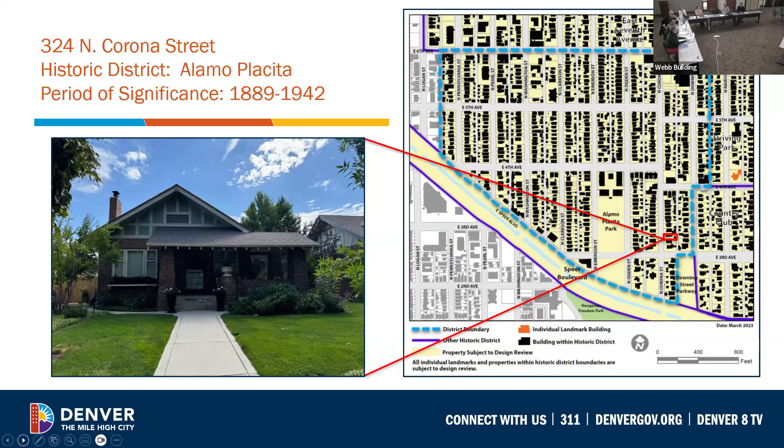The addition roof will be clad in EPDM, and the fascia and soffits will be wood. The addition walls will be clad in HardiePlank, Artisan V-Groove siding, as well as brick veneer. The plank siding will have a reveal that has changed from the previous design, which was 4 to 8 inches alternating, to 3 to 5 inches alternating. The applicant added a 3-foot water course with a soldier course cap that aligns with the foundation banding detail on the primary structure. This was something presented or recommended by the commission at the February 18th meeting. The proposed brick veneer will be a salvage brick material to match the historic foundation of the house.

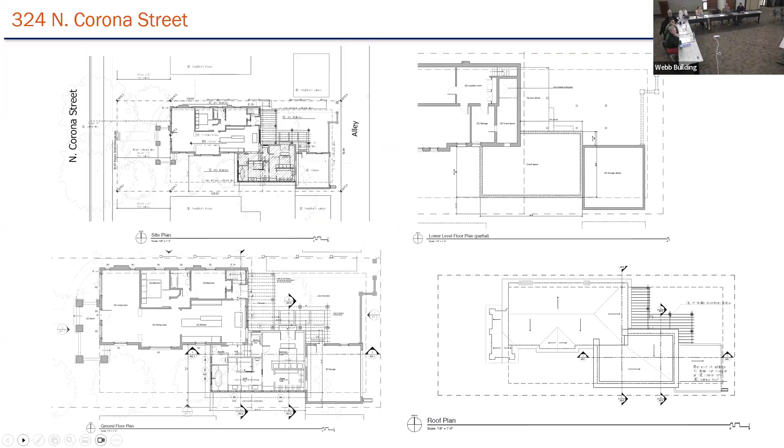Nope, actually can you move forward? Forward again. Forward again.

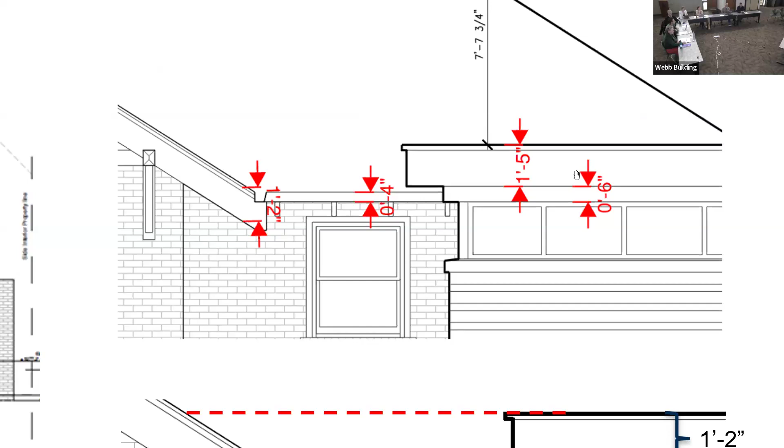Here. So you can see in the upper right-hand image, the 1 foot 2 inches is the distance, basically that fascia board that runs at the gable ends of the primary structure. The 4 inches references the horizontal detail on the hipped roof portion of the structure. So those were the reference points that we were pulling from. These may not be exact. I pulled these dimensions from Bluebeam, so those would need to be detailed out by physical site measurements, just to make sure there's better alignment. Thank you.

Any other questions? Right, I think we're ready to hear from the applicants.

If you would begin with your name and... Anne Cuthbertson, the architect for the project. The owner, Nancy Van Cleve, is also here present. And you have up to 10 minutes. Perfect.

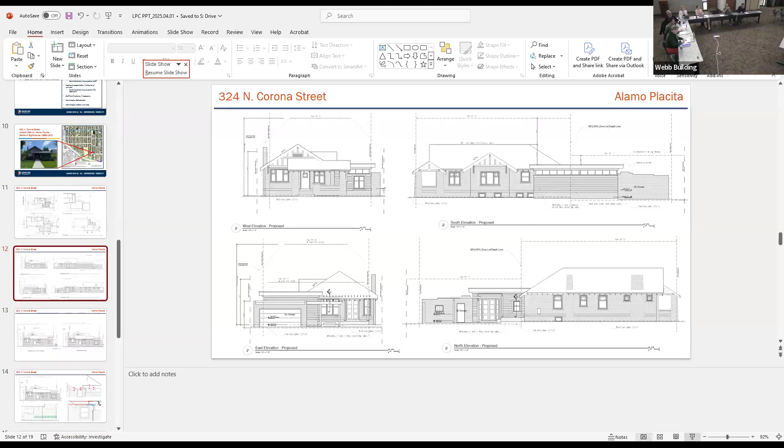I just wanted to summarize the changes that we did make. I hope and think that we addressed all of the comments from the commission's last meeting. And Jesse reviewed them, but there were a couple of comments that were very specific that we think we've also addressed, and I just want to highlight those. We don't have to go back through the drawings for right now.

One comment had been that someone was uncomfortable with how the siding just seemed to die off at the bottom, and so we're hopeful that the brick course will give the siding a more pronounced place to land at the bottom. The other thing that was in the submittal package, but I don't know that it was highlighted in the slides, is we did include some images. Someone had commented that they were having trouble visualizing what we meant by alternating the siding heights, and so we had pulled an image of another project that showed that.

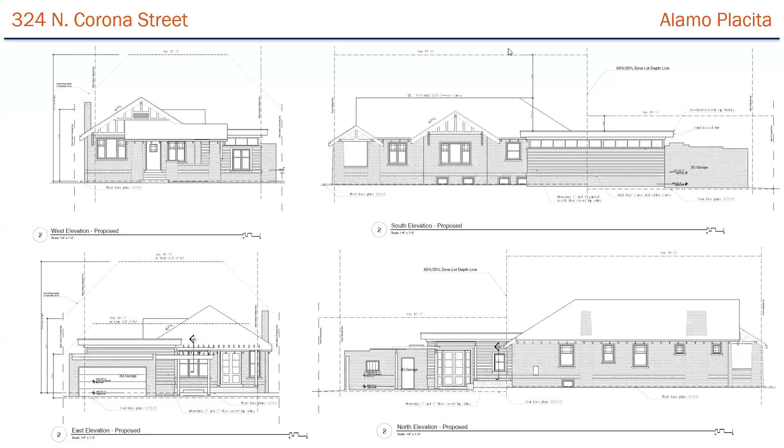Brittany, is that something that you could bring up? It would have been part of the photographs. I unfortunately don't have that, but the commission would have it in their packet, Anne. Okay, so it's probably the second to last image of the photographic part and the product information in your packages. I don't know if you guys can find that now.

That was just in reference to someone saying they had trouble visualizing what we were talking about with the alternating. I, in general, like to alternate the siding so it takes it away from being so overused, particularly in suburban parts of town. I find it gives a little bit more detail to an otherwise fairly commonly used material. But I want to make sure that you understand the image that I included was the larger widths or heights.

And we are talking about something more compressed than that. So we're talking about alternating 3-inch and 5-inch, which still courses out with the brick module that we were trying to work with before, but it just meets the guidelines more specifically in terms of that maximum height. So hopefully that image was helpful for people that were having trouble picturing that. I think more than one commission member wanted just to understand what we meant by that alternating height.

There was a difference of opinion, I'd say, last time in the comments I heard about the windows stepping down compared to the existing house. So one of the things I want to say about the west elevation is, as you practicing architects know, these orthographic projections are such an abstraction. That's never how you'll see a 3-dimensional object in space.

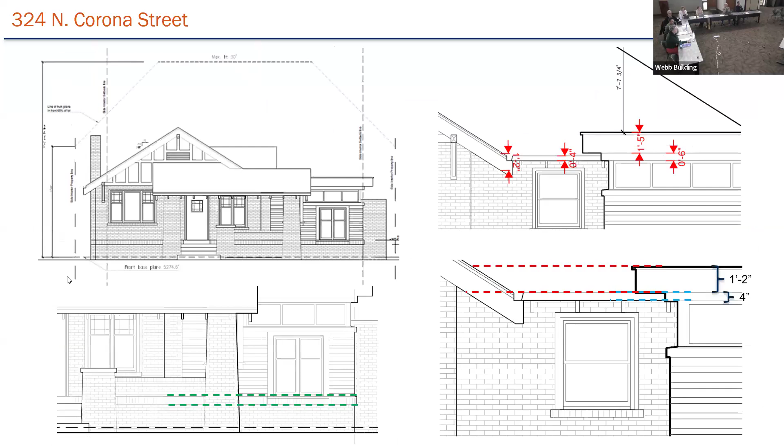So if we could go, Brittany, to the image with the section that showed the entire west elevation... maybe one more? I only have what Jesse put in the presentation. She showed it in the drawing I'm talking about, a section through the main house that shows the entire west elevation of the addition. There it is. Yes, thank you. Okay, continuing your time.

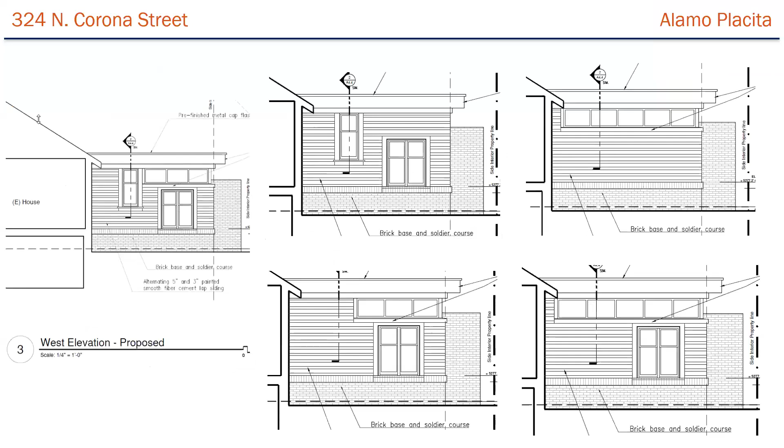So you can see the floor level of the main house in this section, and the sill of the powder room window, the furthest one on the left. That sill matches up with the kitchen window right around the corner on the main house. I think that relationship would read very strongly when seeing the addition in conjunction with the main house, as well as the brick soldier course carrying directly around the corner, 2 feet away from the existing window on the main house.

In my view, the proportions of that powder room window, and the proportion of the double cottage hung windows at the main bathroom, are exactly the size of the dining room windows and elsewhere on the house where there are typically paired cottage hung windows. They're exactly the same width, height, and proportion.

So I think, as you're seeing the south elevation of the main house in conjunction with this west elevation, those relationships will be very clear and easy to grasp, even for someone not in the industry. In my view, the height of the clerestory windows picks up exactly with the height of the top sash of all the cottage hung windows on the main house.

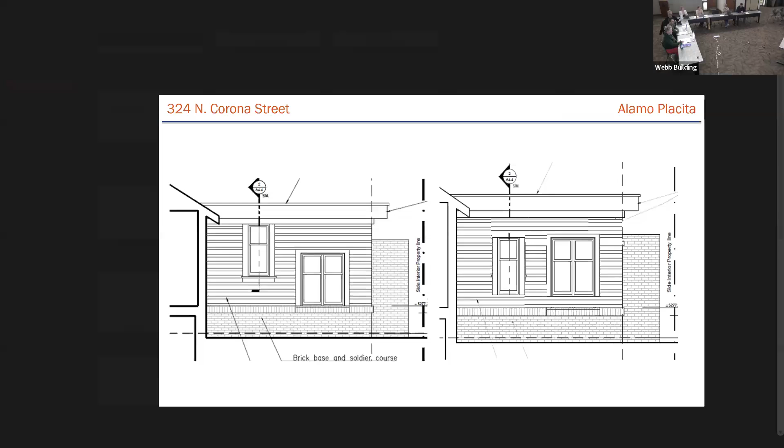I think we tried our best to respond to all the comments from the commission last time. We are certainly very comfortable — it seems like an oddly specific recommendation from staff to change the heights of the header and fascia, but we'd be fine with that if it's a condition of approval. We would like to stay with the west elevation as we're proposing, since it ties the proportions and heights of the main house as it wraps around the corner onto the west elevation, then resolves as it wraps around onto the south elevation of the addition. So that is what we hope is approved: the west elevation as drawn.

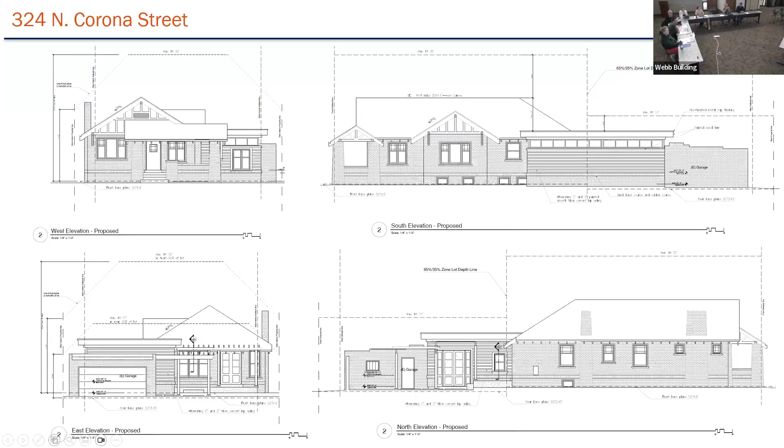Larry: If we didn't approve the west elevation as drawn, would you prefer that be the denial so you have more creative latitude to respond, or would you prefer conditions listed knowing you'd be constrained to keep this? I think my client would really like to move forward with this project, so our goal would be to have approval with conditions. A fifth option that could be considered is the elevation on the west side, but having the powder room window head align with the windows of the bathroom, and by geometry it would have to be a smaller window. But I think that would also be acceptable to Nancy, to have some type of window.

In other words, can I go up? That this window could drop down to be aligned with the head of this window, and then maybe it's just the top sash is the entire window. That would be acceptable, or even a smaller window, something operable into the powder room, right?

Somebody's phone. Jesse, is this yours? Yes.

On your proposed west elevation, would you consider eliminating the northernmost clerestory pane and then moving the windows below so that they align with the clerestory mullions? Yes and no. The interior of those windows is right centered on a bathtub, which is centered on the whole rest of the bathroom, so it would be an odd loss on the interior to move the double windows.

Yes, Nick. Refresh my memory, the last time you presented, were there more 3D renderings? The only one I see in the resubmittal is within the materials board, and I think it's the dated rendering. I did try to update the 3D model and I just ran out of time, so it's true that we don't have the updated 3D model.

Yes, so Brittany, if we could go to that detail west elevation. Absolutely, staff, as we said during our presentation, we do understand there are issues with the floor to ceiling heights there and that there's a step down from the powder room into that main bathroom area, and that moving it in this way may not be ideal.

We had mentioned in an email to the applicant that another option would be to keep the sill and header height of the paired cottage windows in the same location, but reduce the sash size for the powder room window, and align the header so that we're accomplishing the balance on that west elevation, pulling from proportions on the existing house.

We didn't have enough time to go through all the potential options, and wanted to leave that up to commission deliberation. But that, as the applicant presented as a fifth option, would potentially be one we would be supportive of as well. I understand the perception at an angle may be slightly different, but we don't feel like it will be so significantly different viewing it from the street.

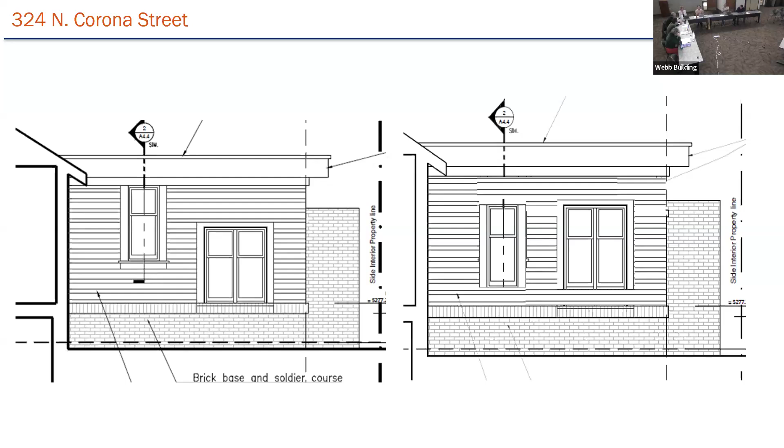Yeah, okay, we can talk about it in deliberation. The compound miter, that's a hard thing to do. It happens all the time. Okay, I think it sounds like, thank you, Jesse. I think we're ready to move into deliberation, talking comments, so let's keep going.

What do you all think as far as? We have at least two broad categories of recommendation from staff, either denial or approval with conditions, but with the knowledge that the conditions should be specific and actionable. So are there any general thoughts on that? I thought maybe we'd start there. I guess what I would start with is...

I'm a little bit struggling with the conditional approval because of the windows, and it feels like the applicant would like to study more options than what are really on the table with this conditional approval. I would say that in terms of the windows, I do agree with staff that the composition of that elevation will be seen largely as an elevational composition from the street, and it does feel kind of jumbled, with a lot happening there, jumping around different levels.

That does feel not subordinate to the main structure. So yeah, that's my feeling. I think the roof one is more straightforward. The windows are hard—that's better said than my earlier comment. That's exactly the point I was trying to get to, is that there's a lot happening there. It's busy and it does distract, I think, from the main structure.

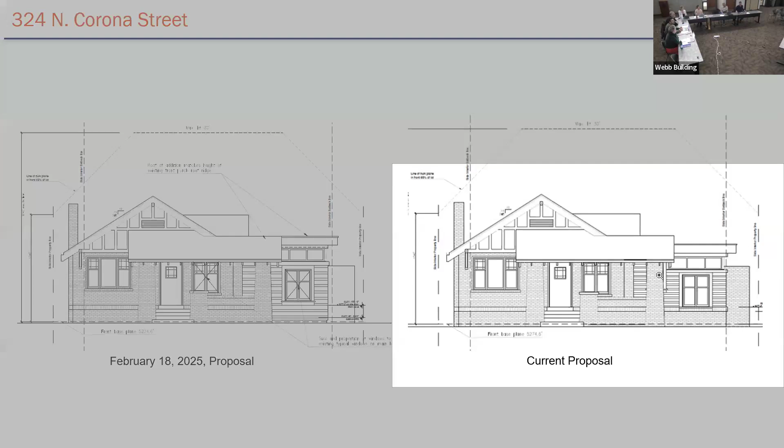That's the only... but that section doesn't really do it justice either, does it? Because that's not what you're really going to see from the street view. Right, this would be more realistic. But you also wouldn't - that powder room window is completely hidden from this view, whereas you would see it just by walking a foot or two to the right.

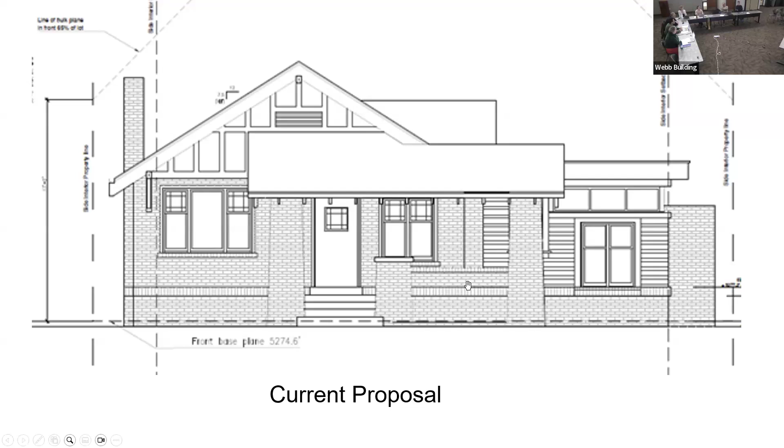Right. So again, the limitations of this orthogonal depiction. Would an option be for us to approve with the elimination of the half bath powder room window, with an understanding that they might come back to us on that element alone?

Jesse, do you have any thoughts on that? I stand by clear conditions. If you're making a condition, knowing that it will likely have to come back to you, it may be cleaner to do denial. But if you can come up with clear conditions that are easily implementable, we can accept that. If it's cleaner for you all to recommend denial, we can accept that. If you feel this is fine as is and you want to approve it, we'll accept that as well.

You can always approve it with the elimination of that bathroom window. I know that's not a condition recommended by staff, but if that is what the commission feels would be the best solution for this project, you can make that a condition of approval. That doesn't prevent the applicant from redesigning it later and adding it back in some other configuration, which may come back to the commission again. But you can always approve it with that condition if that's what the commission feels is best.

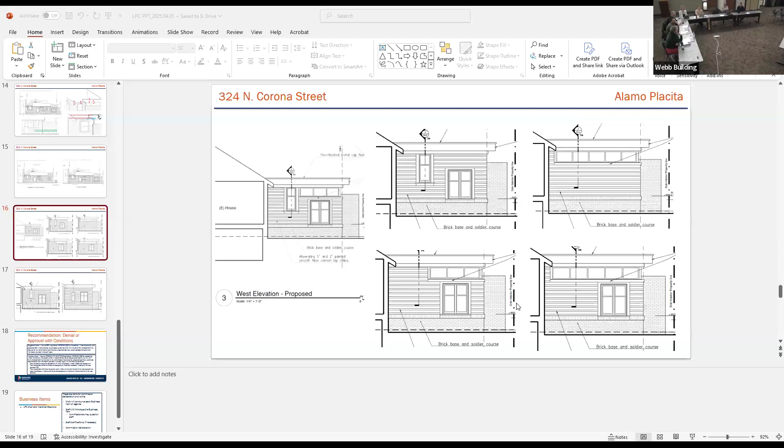In my personal opinion, because it is a powder room, I need light in there. I like light in my home. And if it could be operational but keep the consistency, I would be fine with that. Because it is just a powder room, it's not like the double hung, which is more important to me because that's my master bath.

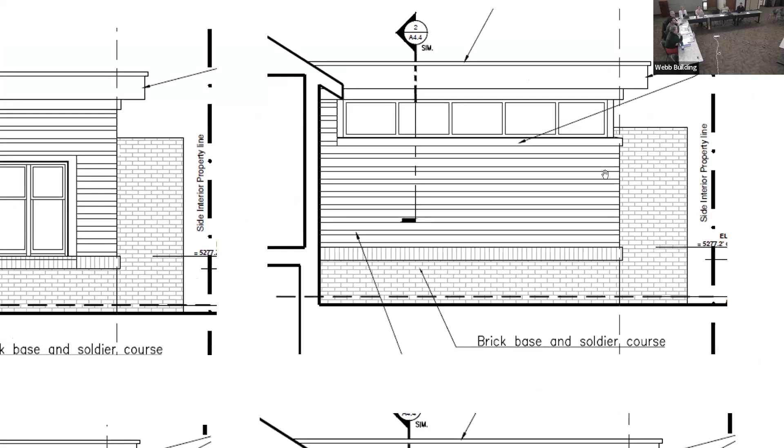Are we able to see option 3? I don't know if it was in the presentation. Is it this one, the bottom right? Right, yes. So what is your feeling about that option? And that question is also generally to the commission as well.

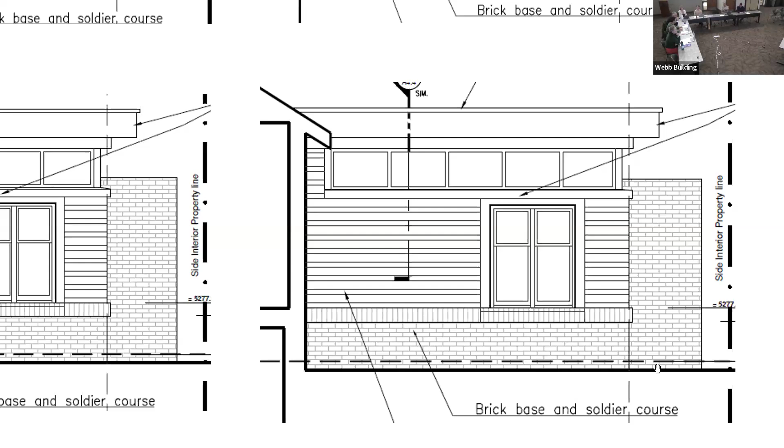We could certainly live with that. Do you think that resolves some of these concerns? Yeah, I think that's the most attractive to me, but it also brings in light, which is your concern.

What's the difference between that one and the one proposed on the drawings? The removal of that - the one on the left is proposed. Oh, it's the one behind the column, staggered. Yeah, right, I gotcha.

I will say, as someone who has western clerestory windows in bedroom and bathroom, they provide a lot of light. It's lovely. So just first comment there, but yeah, I could live with that.

Emily, would we be able to do a condition clear enough, just saying window placement as seen in option 3? Would that be sufficient for staff? I believe that's how I have it listed in the application materials. I think that's clear enough.

Clear direction, yes. So if you could support the approval with conditions as written, which would include that as an option, as long as the secondary condition references this option, given the amenability of the applicant and also the commission, I can be in support of that.

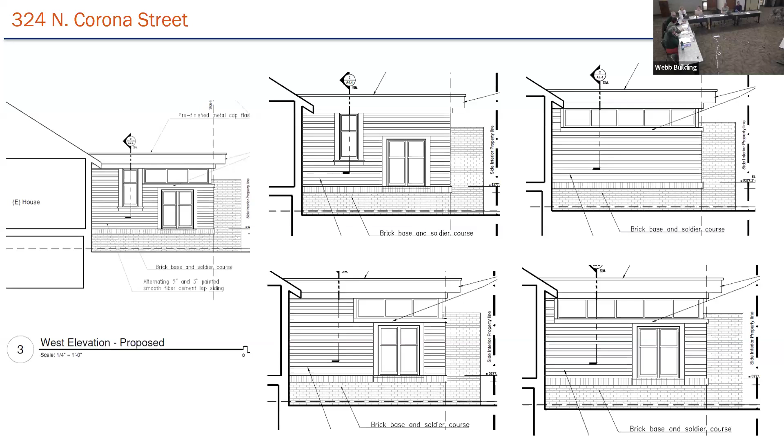Anybody else? Yeah, but I was just going to ask about staff's recommendation of the fascia heights and the 4 and 1.5 - is that, keeping that language in there?

I would like to, but I would again like to hear from the rest. I would support that myself, and they already said that they would be amenable - reducing 1.5 to 1.2, and 6 to 4. Fixed it, yeah.

The reference - if I'm reading the language correctly, what we would do is remove the second bullet from the conditions, and the third, now second bullet, eliminating the powder room window on the north corner of the west elevation, but keeping the clerestory windows. Well, oh, I see, so we do want to say option 3, because that isn't referencing moving the clerestory windows all the way across the elevation.

Could we instead just say that the applicant utilizes the window placement in option 3? Just remove the last two conditions but create a shorter one. Just so I make sure it's recorded correctly, could we keep this but extend the clerestory windows? That way it's spelled out clearly, in case I don't have it listed as option 3 in the application materials. I just want it to be very clear for the record.

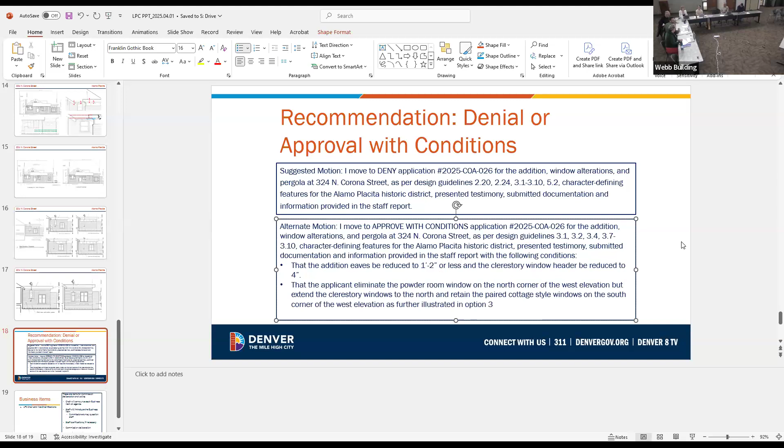Yeah, I can support that. Can't read it, but I can. Does anyone feel confident that they could? Give it a try. So the vocabulary, we'll be ready to make friendly amendments. Madam Chair, I move, I think Brittany wrote it up on the screen. Oh, look at this. All right, then I definitely feel confident.

I move to approve with conditions application number 2025-COA-026 for the addition, window alterations, and pergola at 324 North Corona Street, as per design guidelines 3.1, 3.2, 3.4, 3.7 through 3.10, character defining features for the Alamo Placita Historic District, presented testimony, submitted documentation, and information provided in the staff report, with the following conditions. One, that the addition eaves be reduced to 1'2" or less height, and the clerestory window header be reduced to 4 inches in height. Two, that the applicant eliminate the powder room window on the north corner of the west elevation, but extend the clerestory windows to the north, and retain the paired cottage style windows on the south corner of the west elevation, as further illustrated in option 3.

Thank you, Larry. Do we have a second? I second that. Chris, thank you for seconding. Okay, all those in favor say aye. Any opposed? All right, the motion carries.

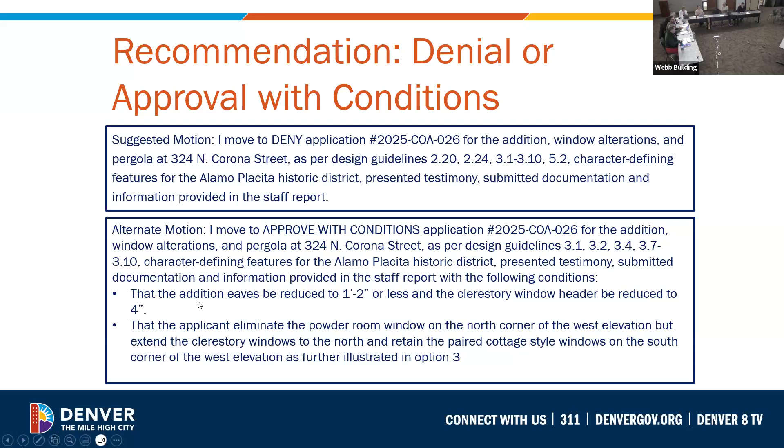I believe that concludes our design review agenda, and then we just have business items of electing our chair for the coming year and vice chair. I just did by introducing that. So any questions on that?

I'd like to congratulate the commission for staying with it. Yeah, kind of fun, I know. Yes, this was for the dialogue amongst us versus just telling opinions. Thought it was going to be 5 minutes, it turned into an hour. We have the time.

Okay, so I guess, do we have nominations for chair and vice chair for the coming year? Is that what we need to do next? Yeah, and maybe you all want to speak to whether you're interested or not, and then let others make a nomination. And you do need to make a motion and vote on this. You can combine it into one, or you can do two separate motions depending on how you feel about it.

Campaign speeches, maybe. Nominate Erica for chair if she's amenable. Yes, agreed, fantastic job. Oh, thanks. I felt on top of it today. Ooh, yeah, that would be great. I would be happy to.